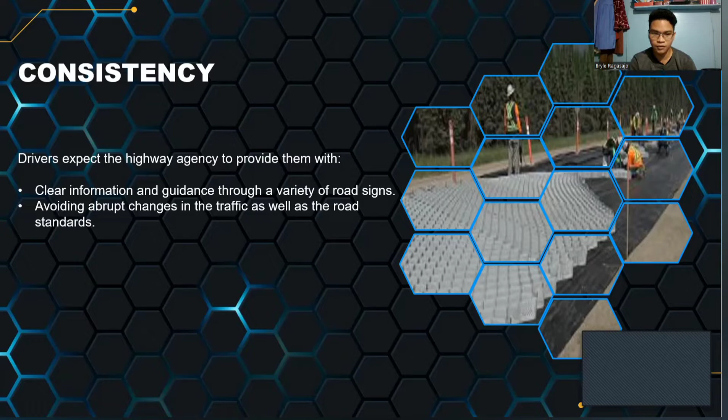AASHTO is the American Association of State Highway and Transportation Officials. In 1914, the American Association of State Highway Officials, or AASHO, was established as an association of state, territorial, and district of Columbia highway departments and the Federal Highway Administration. The name was expanded in 1973 when the Department of Transportation was integrated into the association, renaming it AASHTO, giving the officials of this agency the power to govern its operation.

Engineering activities were implemented by standing committees with the task of preparing specifications, manuals, and standards representing current highway engineering practice. AASHTO publications include transportation materials, specifications and tests, specifications of highway bridges, geometric design standards, and numerous policy statements and guides.

AASHTO publications are authoritative, meaning the information is reliable, accurate, and true. References are made in these books and periodic manuals. The association also publishes the AASHTO quarterly reports on current highway and transportation subjects, including trends, forecasts, and legislation.

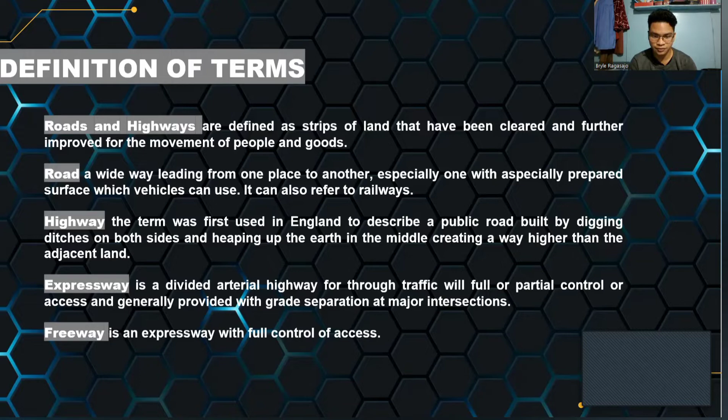Control of access is a condition where the rights of the owners or occupants of adjoining land, or other persons' access to light, air, or view in connection with the highway, is fully or partially controlled by public authority.

There are two types of control of access: full and partial control of access. Both have the authority to control access and are exercised to give preference to through traffic by providing access connection to selected public roads. The difference is that in full control, crossing at grade or direct private driveway connection is not permitted, while in partial control of access, crossing at grade and private driveway connections are allowed.

Through street or through highway: every highway or portion thereof on which vehicular traffic is given preferential right of way, and at the entrance to which vehicular traffic from intersecting highways is required by law to yield right of way to vehicles on such through highway, in obedience to either a stop sign or yield sign erected thereon. It is a street where vehicles passing through have the right of way, as opposed to vehicles from intersecting roads which are obligated to stop before entering.

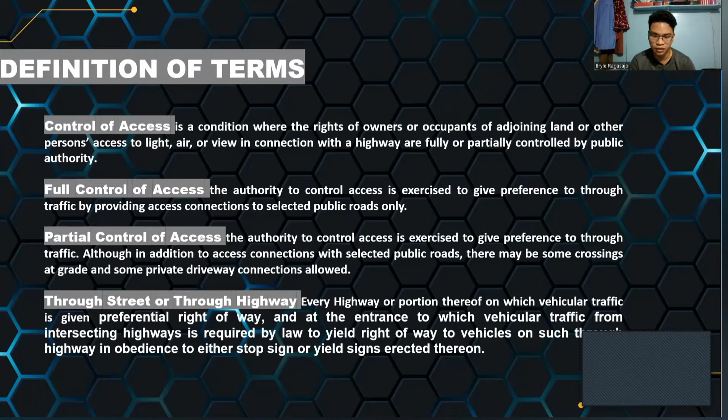Parkway is an arterial highway for non-commercial traffic with full or partial control of access, usually located within a park ribbon or park-like development.

Arterial street is an arterial route that carries traffic to the nearest access point or through traffic. Arterials provide access to adjacent property, but often with restrictions on entry and exit points. It is a wide road, usually divided with an area of grass and trees on both sides and in the middle.

Highway and parkway might sound the same sometimes, but the difference between a highway and a parkway is that highway mainly has two or more lanes having no tolls through in it, and parkway, on the other hand, is a decorated road and has traffic signals too.

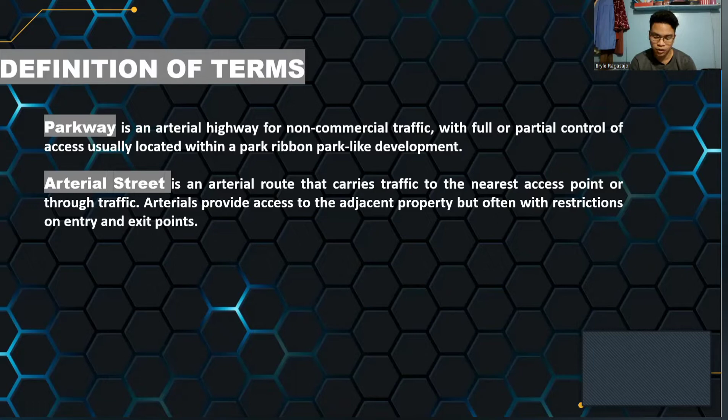There are basic considerations in planning arterial roadways. First is selection of the routes - it is important to know the best place to build the arterial. Two is studies of the traffic volume, like learning about how much traffic it can divert from one place. Three is origin and destination, the location of the arterial roadway and how far it will go.

Four is accident experience. Width should not be less than 15 meters, must carry at least one lane of traffic in each direction, should be at least 1 kilometer in length, should skirt neighborhood areas rather than penetrate them. On grid design system streets, arterials are spaced at about 600 to 900 meters apart.

When accident hazard is not a factor, the minimum volume to justify an arterial road is 300 vehicles per average hour during the day and 450 vehicles hourly during peak periods. Sometimes peak hour traffic volume on a designated arterial road exceeds the capacity of two-way streets.

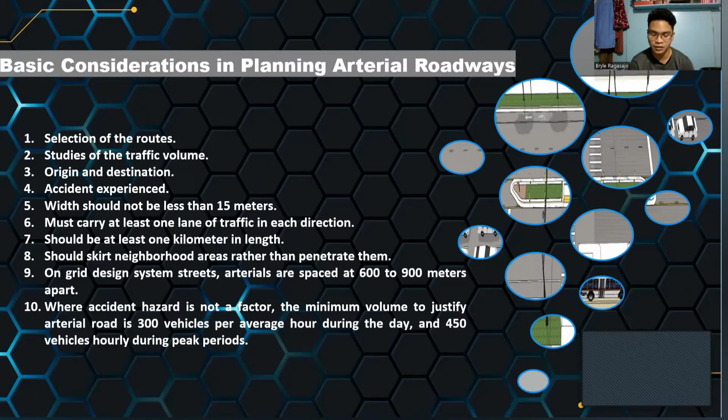Now, to increase the arterial capacity, the following solutions are enforced. During peak hours, parking is prohibited on one or both sides of streets. Parking is prohibited several meters away from each side of the road intersections or corners, and right turn is allowed on red signals anytime with care.

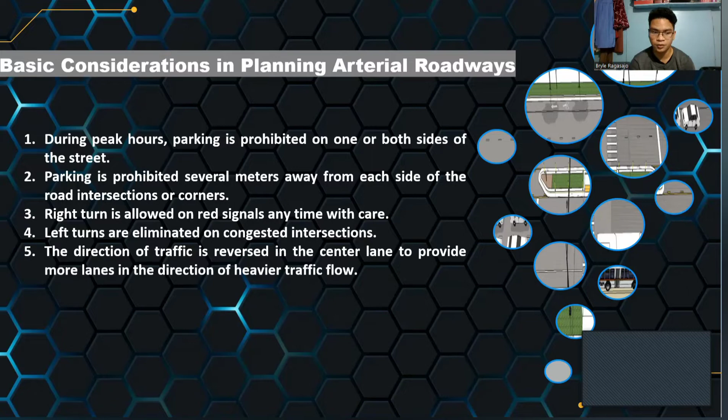Left turns are eliminated on congested intersections, and the direction of traffic is reversed in the center lane to provide more lanes in the direction of heavier traffic flow.

Collector street: it is a street form with a smaller mesh grid pattern where passengers are picked up from service streets and carried to the arterials. Large commercial enterprises or amusement facilities like drive-in theaters are mostly fronting arterial roads.

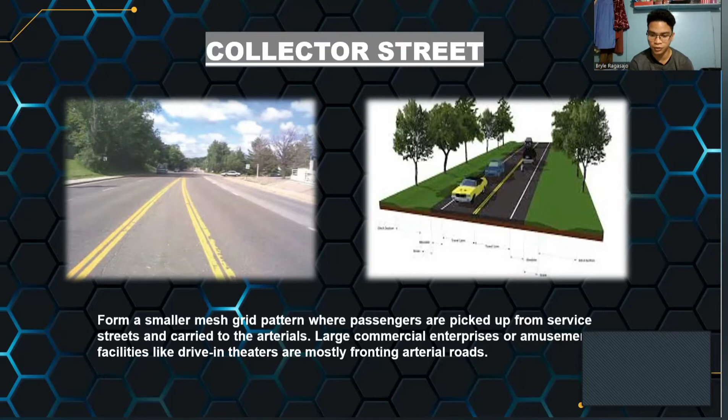Local roads is defined as a street or road primarily for access for residents, business, or other adjoining properties. It is also defined as a road constructed and maintained by the local government. Refers to local roads or streets accepting traffic from collector streets and distributing the traffic through subdivisions, neighborhoods, and business areas to individual homes, apartments, business sites, and industrial sites.

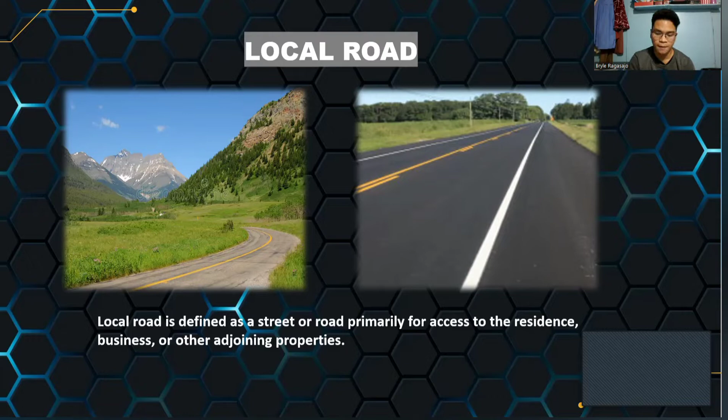Highway capacity is defined as the maximum number of vehicles that are reasonably expected to pass a given point over a given period of time, usually expressed as vehicles per hour.

Under ideal conditions, one freeway lane can accommodate about 2,000 passenger cars per hour, and a two-lane road can carry up to 1,000 passenger cars per hour in each direction. There's an obvious relationship between vehicle speed and highway capacity - as the volume of traffic approaches capacity, the average speed is markedly reduced.

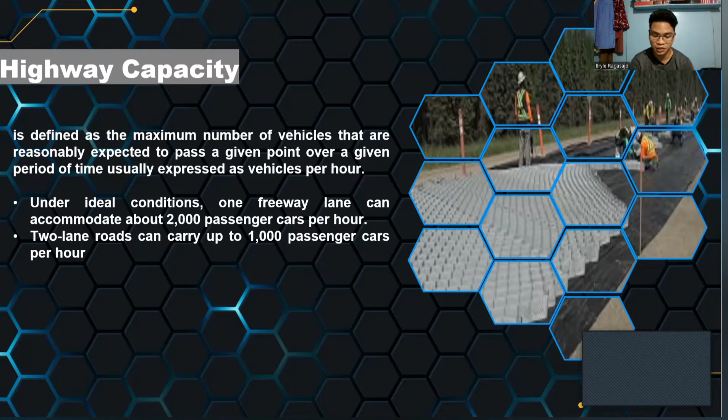Volume may be stated on hourly observed traffic volume or estimated 30th hour volume, commonly used for design purposes. Some highway agencies use traffic volume for 5 minute intervals to distinguish short peak movements of vehicles.

This is determined by counting the total numbers of vehicles to cross a point in both directions on a highway during a year and dividing this value by the number of days in that year.

So for example, ADT is equal to the total volume of vehicle traffic for 1 year divided by 1 year, so 365 days.

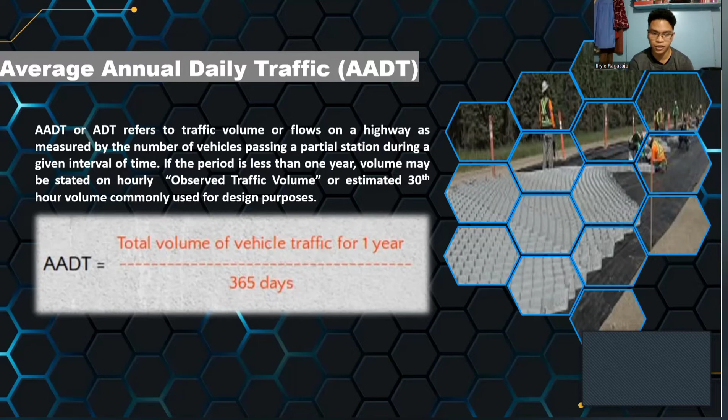So design speed. There's no single set of geometric standards that will apply to all highways. For every highway segment, decisions regarding appropriate control for each of the many details or requirements must be addressed individually or separately.

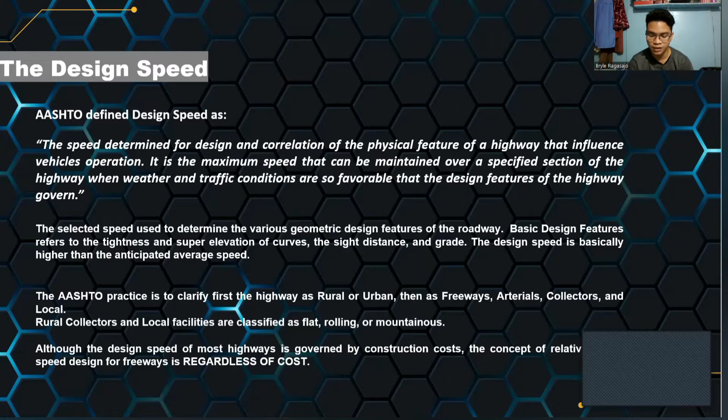AASHTO defines design speed as the speed determined for design and correlation of physical features of a highway that influence vehicle operation. It is the maximum speed that can be maintained over a specific section of a highway when weather and traffic conditions are so favorable that the design features of the highway govern.

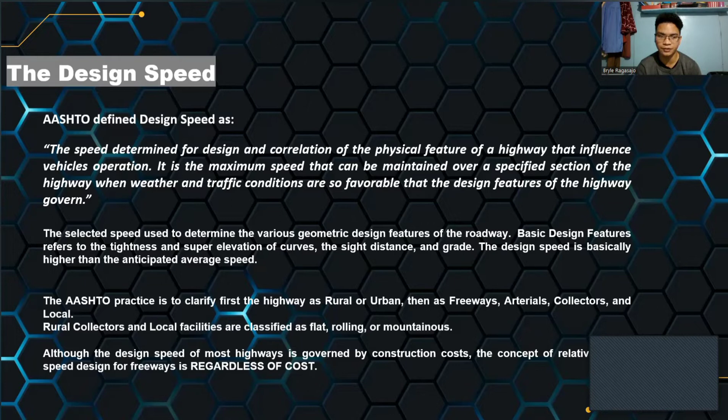AASHTO recommended that the design speed be set to the greatest degree possible to satisfy the needs of nearly all drivers, both today and throughout the road's anticipated life.

For economic reasons, the geometric features of certain road sections are designed for speeds from 30 to 50 kilometers per hour, yet some motorists drive faster on straight road alignments or less sharply curved sections. Under these situations, highway design adopts control by reducing the superelevation, combined with easement curves, delineators, striping, signs, and rumble strips to alert motorists and inform them that they are approaching sharp or blind curves.

Selection of the proper road design speed is one of the most important decisions to make because it sets the limit to curvature, sight distance, and other geometric features.

But because of limited funds, there's a strong temptation to reduce this design speed. Such a decision is unwise because the alignment, grade, and sight distance after the roadway has been constructed and paved along the landscape and right-of-way become more difficult and expensive to adjust or correct.

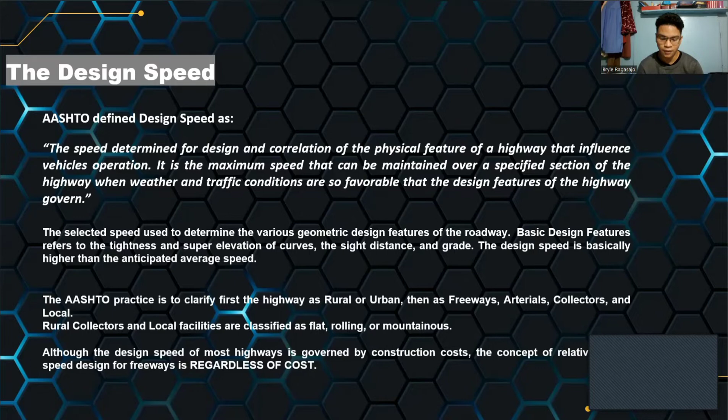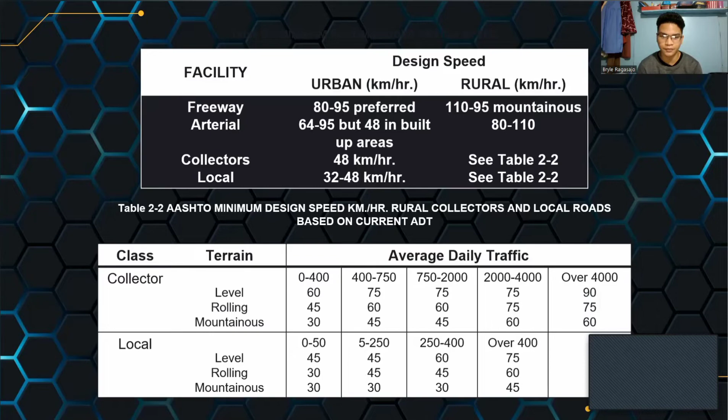The cross-section of a typical highway has a multitude of variables to consider, such as the volume of traffic, character of the traffic, speed of the traffic, and characteristics of motor vehicles and the drivers.

Highway designs usually adopt a cross-section that is uniform in thickness from end to end of the improvement. This is acceptable on high-volume traffic road facilities. For low-volume traffic facilities, modifications of features like shoulder width in rough areas are usually employed to reduce costs. A cross-section design generally offers the expected level of service for safety, and recent studies support this.

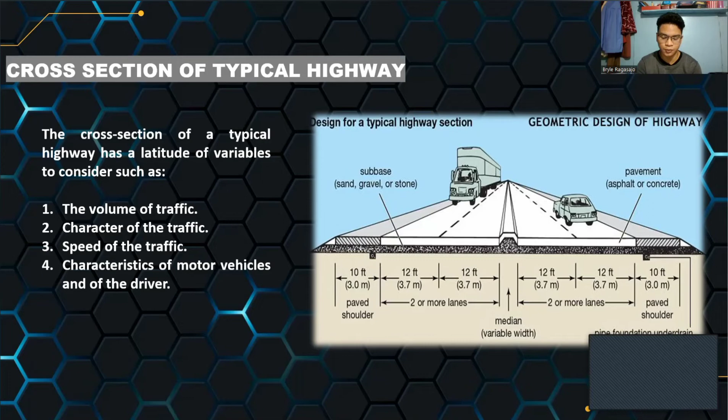Highway design usually adopts a cross-section that is uniform in thickness from end to end of the improvement. This is acceptable on high-volume traffic road facilities, but for low-volume traffic facilities, modifications of features like shoulder width in rough areas are usually employed to reduce cost. A cross-section design generally offers the expected level of service for safety, and recent studies show that a 7.20 meter wide pavement has 18% fewer accidents compared with a pavement narrower than 5.50 meters wide.

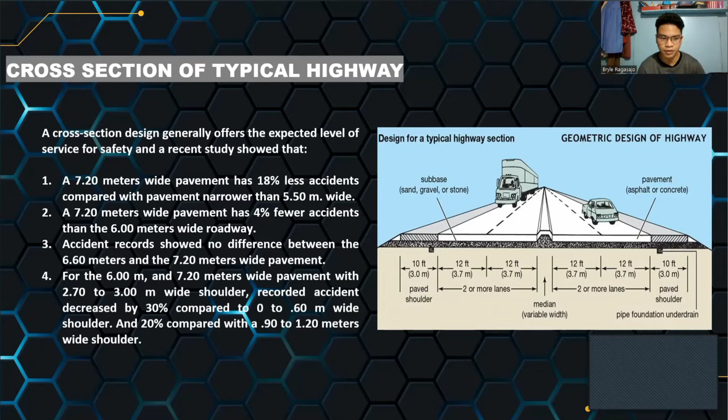A 7.20 meter wide pavement has 4% fewer accidents than a 6 meter wide roadway. Accident records show no difference between 6.60 meter and 7.20 meter wide pavement.

For the 6 meter and 7.20 meter wide pavement with 2.70 to 3 meter wide shoulders, recorded accidents decreased by 30% compared to 0 to 0.60 meter wide shoulders, and 20% compared with 0.90 to 1.20 meter wide shoulders. It appears that these differences in accident potential may not justify higher standards, particularly when traffic volume is low.

The driver's instinct when overtaking, allowing other cars to overtake, or meeting oncoming vehicles is to look at the surface width of the highway and the kind of surface, to decide where to position his car.

Originally, the total surface width of the roadway was only 4.50 meters, but due to the increase in the number of vehicles using the roadway, the width was adjusted to 4.80 to 5.40 meters.

Lately, the width of the road was standardized to 3 meters for first-class paved one-lane highways, and now 3.60 meters wide surface was adopted as standard for freeways and other major traffic roadways, although there are strong demands to increase it further from 3.60 to 4.20 meters.

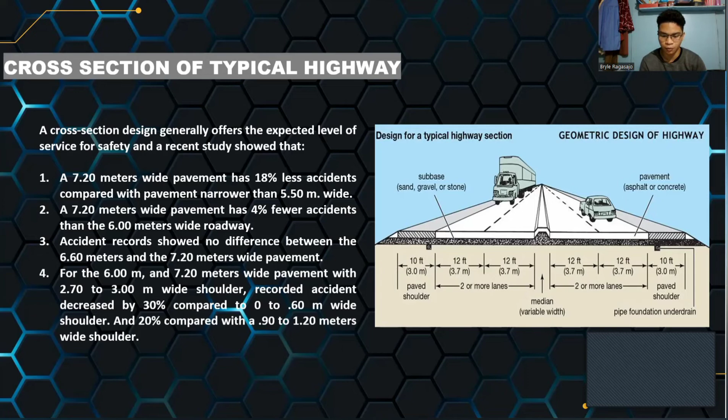For two-lane rural highways, a 7.20-meter wide surface is required for safe clearance between commercial vehicles and is recommended for main highways. For collector roadways, a 6-meter wide surface is acceptable only for low volume traffic with few trucks traveling on it. For local rural roadway, the minimum surface width is 4.80 meters for a 30 kilometers per hour design speed. For urban roadway, the minimum design width is 3.60 meters, although 3 meters is allowed where space is limited.

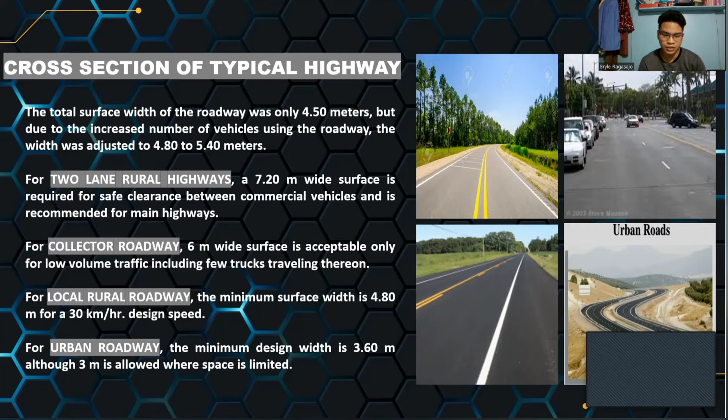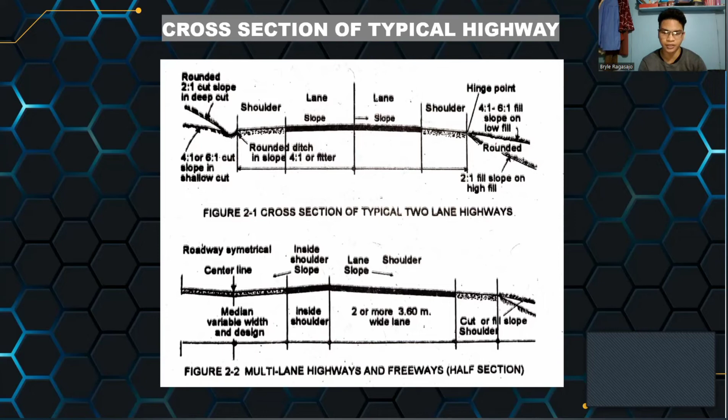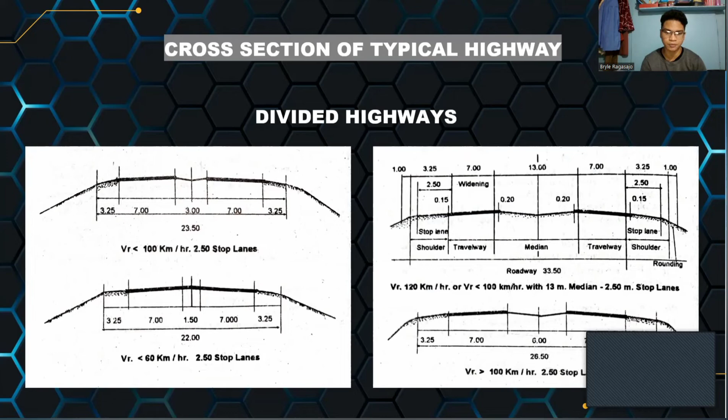This is the cross-section of a typical two-lane highway and a multi-lane highway and freeway, shown as half section. This is the divided highway where speed is less than 100 kilometers with 2.50 meter stop lanes, or less than 60 kilometers with 2.50 meter stop lanes. And this is the undivided highway where speed is less than 100 kilometers per hour for 3.50 meter lanes with 2.50 meter stop lanes, and also 3.50 meter lanes with 2-meter stop lanes.

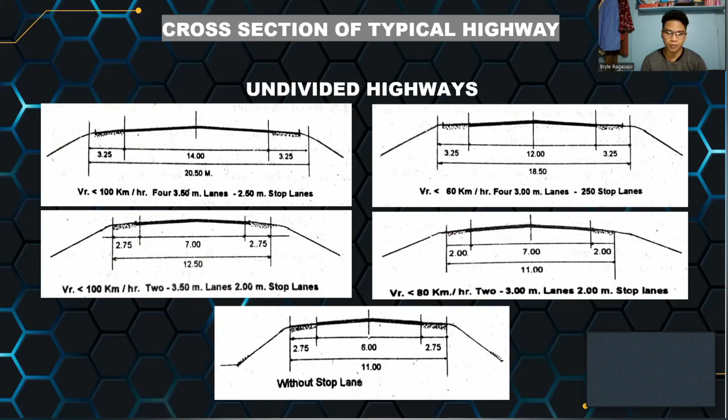Road shoulder or verge is defined as the portion of the roadway between the edge of a traffic lane and the edge of a ditch, gutter, curb, or side slope.

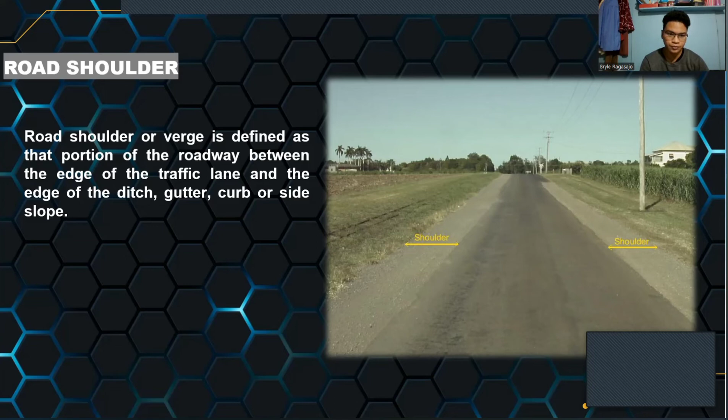The importance of the road shoulder: it serves as a place for vehicles to stop when disabled or for some other purposes. Road shoulder considerably reduces road accidents. The road capacity is decreased and accident opportunities increase if a shoulder is too narrow or omitted in design.

Shoulder should be continuous along the full length of the roadway. It also adds structural strength to the road pavement. Shoulder increases the horizontal sight distance on curves. It reduces accident potential when vehicles stop during emergencies.

Most road shoulders in rural areas are unpaved, having a width of 60 to 120 centimeters, either earth-filled or gravel surface, such that during rainy days drivers are hesitant to occupy them. A continuous narrow white line strip at the edge of the roadway that separates the shoulder serves as a guide to drivers during bad weather and poor visibility conditions. The white strips tend to keep drivers in the traffic lane, and vehicles seldom infringe on the shoulder.

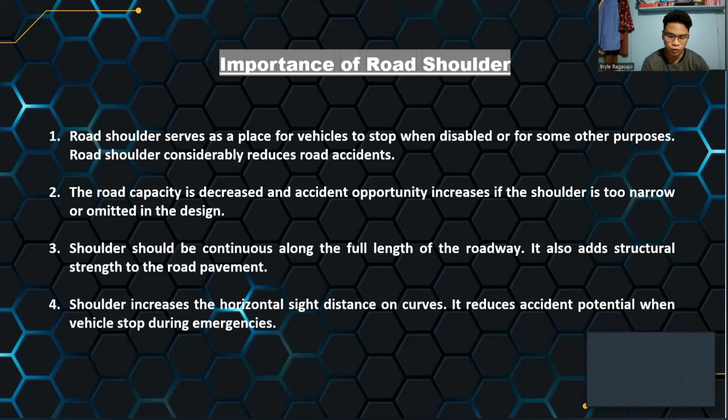The policies on geometric design recommend that outside shoulder should be paved for at least 3 or 3.60 meters wide if truck volume is more than 250 in the design hour. The recommended width of left or median shoulder is 1.20 to 2.40 meters, with at least 1.20 meters paved. If there are 6 or more lanes, the median shoulder should be 3 meters wide, or 3.60 meters if truck volume in the design hour exceeds 250.

For arterials with ADT less than 400, the usable shoulder width is fixed at 1.20 meters minimum, although 2.40 meters is much preferred. When the design hour volume ADT exceeds 400, the usable minimum shoulder width is 2.40 meters, although 3.60 meters is recommended. For urban arterial roads, similar shoulder without curb is suggested unless needed for proposed drainage.

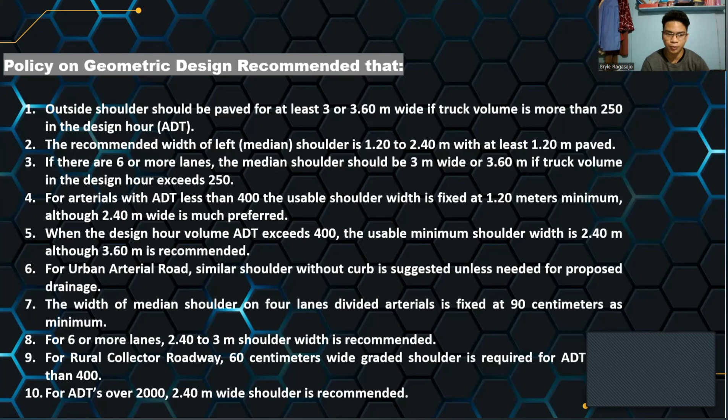The median shoulder width on 4-lane divided arterials is fixed at 90 centimeters as minimum. For 6 or more lanes, 2.40 to 3 meters shoulder width is recommended. For rural collector roadway, a 60 centimeter wide graded shoulder is required for ADTs less than 400, and for ADTs over 2000, a 2.40-meter wide shoulder is recommended.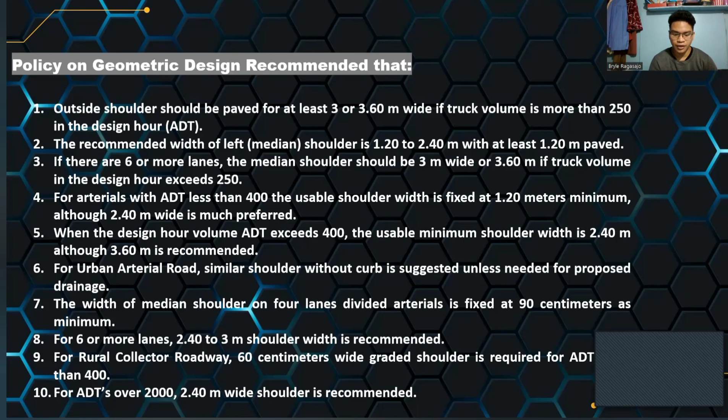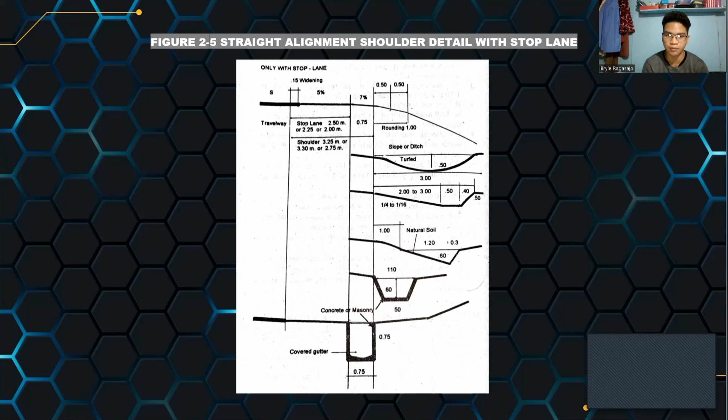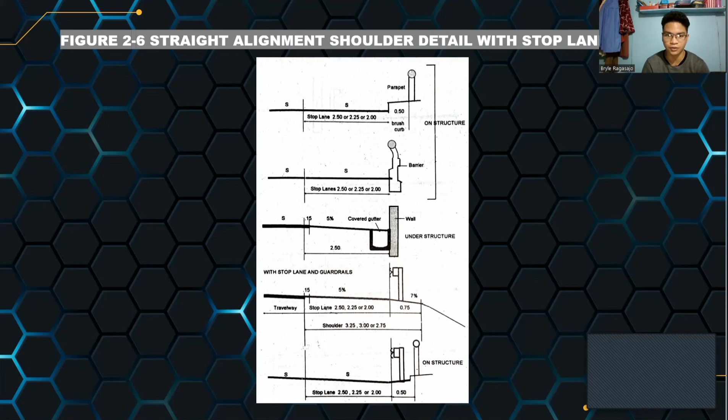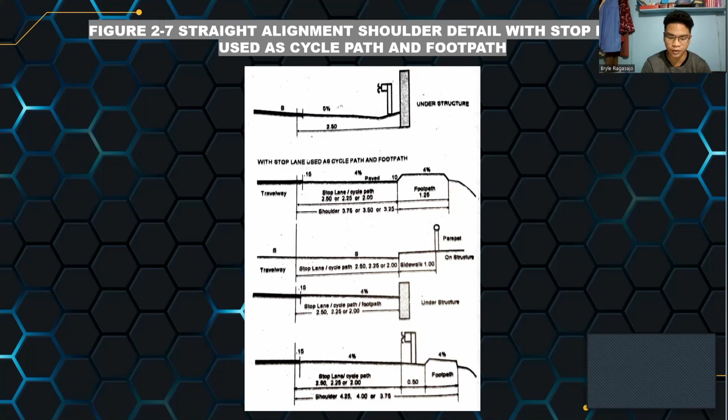This is the straight alignment shoulder detail with stop lane used as a cycle path or footpath, designed as a bike lane or walking path. And here, there is no stop lane, no footpath, or no guardrail shoulder.